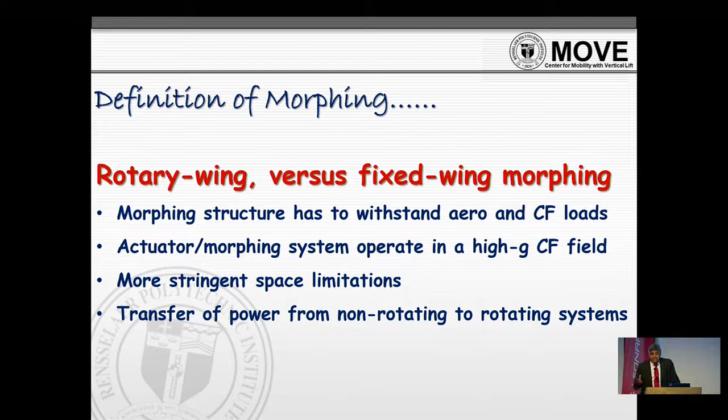The other big challenge is the transfer of power from the non-rotating to the rotating system. That could be electric power, hydraulic power, or pneumatic power, usually done through a slip ring. In a lab environment or in a wind tunnel, it works and you get the test done and show your results. But in an operational environment which is harsh with sand, ice, and moisture, the longevity of such systems becomes a challenge.

I want to talk a little bit about morphing classification and general categorization. In the fixed wing world, they use terms like gross morphing and fine morphing. What is gross morphing? Large things. If you change the sweep of a wing, that's gross morphing. If you're trying to change the span, big things, right, it's gross morphing. Smaller things like camber of an airfoil or slight nose droop, the fixed wing community thinks of as fine morphing.

But in the helicopter world, the distinction is typically based on frequency. If you're doing high frequency, low amplitude changes, that is basically active rotor control, done for a long time for vibration reduction, noise reduction, a couple of degrees of twist or a few degrees of flap deflection. Rotor morphing generally refers to higher amplitude, generally quasi-static deformation. It could be low frequency, one per rev, but generally larger shape changes, not so much for vibration and noise, but for other reasons that we will talk about.

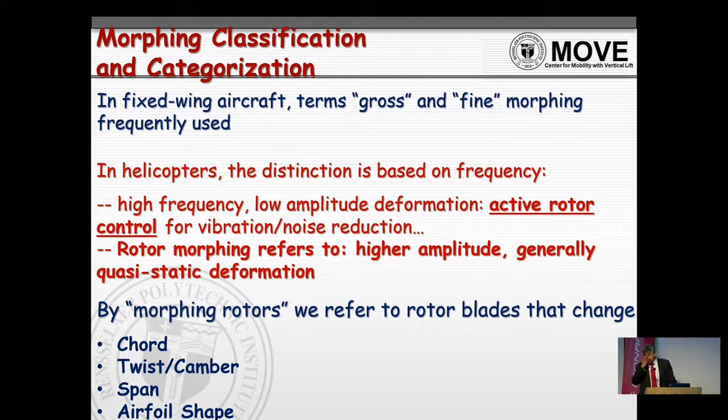So by morphing rotors, we typically refer to rotor blades that may change the chord, the twist, the camber, the span, or the airfoil shape. And if you're able to do all of that, what are the benefits it will give us?

First, it can give you optimal performance in diverse operating conditions, because typically the optimal geometry for hover versus high-speed flight can be different. If you have a fixed geometry rotor, it's either optimally designed for one condition and performs poorly elsewhere, or it's a compromise solution that doesn't do very badly anywhere, but doesn't do very well anywhere either. So the ability to change configuration would give you optimal performance at diverse conditions.

You're not dealing with a compromised design. Of course, you always have to think about a cost-benefit analysis, whether the benefit it gives you outweighs the cost. That's important. The other thing you can get with morphing is expansion of the operating envelope.

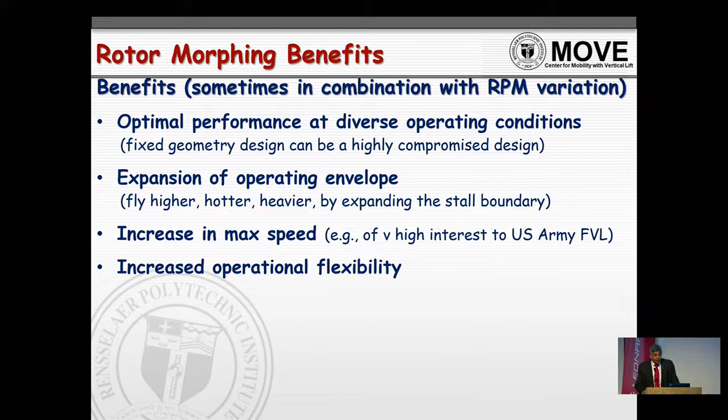So you may be able to fly higher, hotter, heavier, expand the stall boundary. You can increase the maximum speed. This is something that's of very high interest to the U.S. Army right now. They're working on the Future Vertical Lift program, and morphing also has the possibility to get increased operational flexibility.

So I'm going to dive into different types of morphing, okay? Let's start with chord extension morphing. Now, if you think of chord extension, I can extend the chord in two ways. One, I can have an elastic structural deformation, right? So I can have some substructure that deforms, maybe some skin that deforms or slides, or I can have effective chord increase through discrete shape change.

For example, if you look at these top figures here, what we have is a slit trailing edge and an extensible trailing edge plate.

So you look at it and you might say that an optimal airfoil performs very well. It gives you very high lift over drag, right? Now you have this optimal airfoil, and you've ruined its shape by sticking out a plate. The fact is that when you do it, it doesn't do that badly. It doesn't do that poorly, and it gives you the big thing you're looking for, which is the increase in the solidity of the rotor, or more blade area. This is something you can do rather easily as compared to elastically deforming a structure to significant extents.

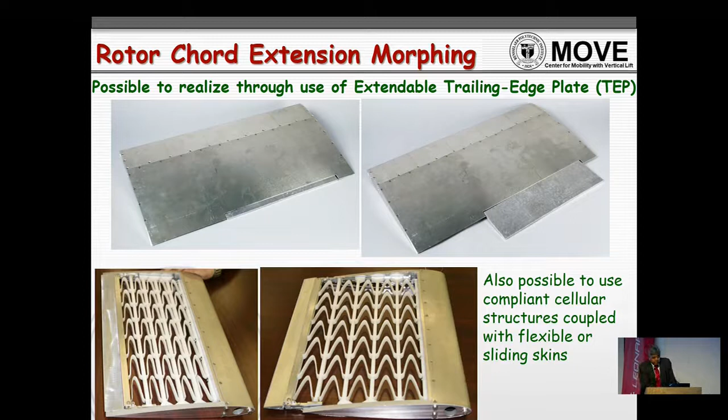So there are different ways you can achieve a particular goal. Now, when you think about chord extension, when do you typically want to use it? You typically want to use chord extension at the stall boundary, right? Because normally when you have a certain chord, and let's say you're near stall, you're flying hot, flying heavy, flying high, the first thing you're going to do is increase pitch and try to generate more lift, to compensate for, say, density reduction. And then you can do it no more because of flow separation or stall. That's when chord extension will really help you. So in a way of speaking, chord extension is a high lift device, right?

So if you're going to be using a high lift device, you should then compare it with other high lift devices, right? So one example of a high lift device is basically a gurney flap. A gurney flap is a small device that comes out perpendicular to the lower surface, and it can be right at the trailing edge, or maybe around 85-90% chord, and it can be either fixed or retractable, and it can be deployed.

So a gurney flap increases the max lift coefficient. However, if you look at CL versus CD, right? And if you look at a gurney flap, the black curve here that you see is for a baseline airfoil, and this red curve that you see is with a 2% chord gurney flap. So you get this increase in maximum lift coefficient, but see what happens to the drag, right? So at low CL, where you don't need the gurney flap, then you're paying a very high drag penalty.

On the other hand, if you look at this extendable trailing edge plate, this is the same airfoil in black, and in blue, what you have is the extensible trailing edge plate. So at high CL, what you've done is effectively increased the maximum lift coefficient by increasing the chord of the airfoil, but you don't pay this drag penalty at low CL. So that's the advantage of using an extensible trailing edge plate as opposed to a gurney flap.

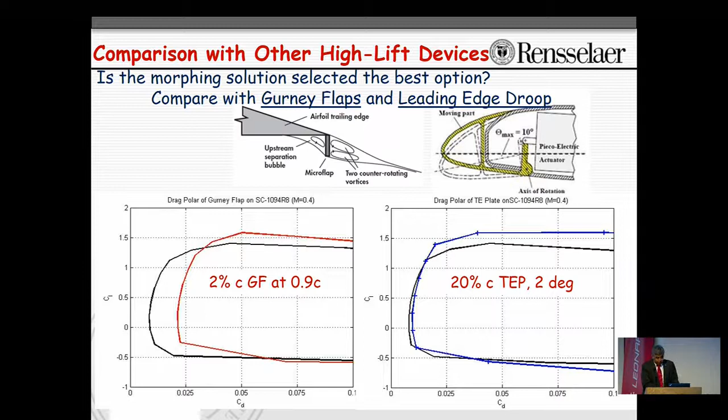So, in the next slide, I want to show the kind of performance benefits you'll get. Here are some simulations for a UH-60A Black Hawk helicopter at 130 knots, showing power on the y-axis versus gross weight on the x-axis.

What I have here are pairs of curves, the blue and green curve together form a pair, and there are three pairs. This pair is at 4,000 feet, this pair is at 8,000 feet, and this is at 12,000 feet.

Let's take this pair here at the lowest altitude. The curve in blue represents the baseline aircraft, and this pull-up you see represents stall, because it's telling you you're consuming more and more power but not able to generate any more lift. That's why the curve starts to pull up.

If you have an extensible trailing edge plate, on the Black Hawk from 63 to 83% span, so 20% span, with a plate that extends about 20% chord coming down at a 2-degree angle compared to the chord line, you'll move from this blue curve to this green curve. And that happens at any altitude.

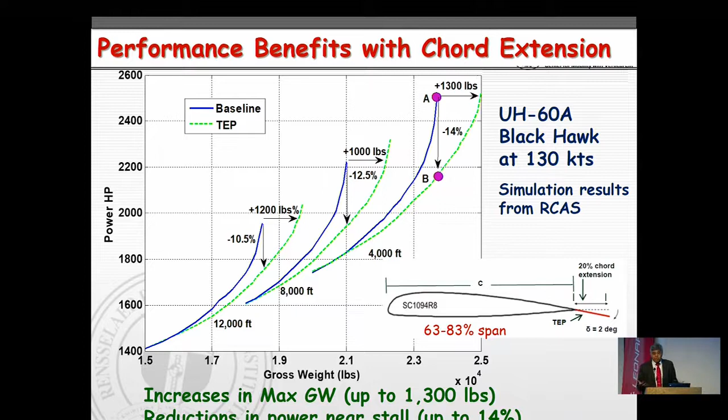So you can look at this pair of curves in two ways. Supposing I drop from point A to B, that says if there's no increase in gross weight, I get something like a 14% reduction in power close to the stall boundary. If I move in the horizontal direction at the same power, I get about a 1,300-pound increase in maximum gross weight. For a 20,000-pound aircraft, that's a significant percentage. So those are the performance benefits you get with chord extension morphing and stall alleviation.

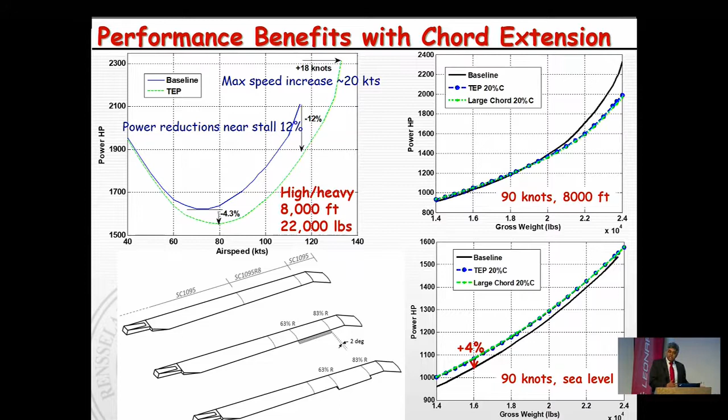So the point is this: I'm going to be operating most of the time in benign conditions, not all the time at the edge of the envelope. If I give myself a high chord to hit those points I may fly some small percentage of the time, I don't want to pay this 4% power penalty the 95% of the time when I'm not at the stall boundary. That's the benefit of morphing - you use it when you need it, and when you don't, you gain by not paying this power penalty.

Okay, so likewise, if you look at this particular chart, what I'm showing is some levels of vibration. Again, this is for the Black Hawk at 90 knots, at 8,000 feet. We have on the x-axis gross weight, so it's increasing gross weight. And on the y-axis, you have the 4P vibratory hub loads.

The leftmost plot is vertical shear. This is in-plane shear, so a combination of Fx and Fy. This is in-plane moments, so a combination of pitching and rolling moments. The baseline aircraft without chord extension is shown in the blue curves, and when you have chord extension morphing, you fall to the green curve. So you can see 47%, 30%, 50% reduction in vibrations.

Why do you have reduction in vibrations? Because the baseline aircraft was in deep stall conditions, and stall is not great for the rotor. Once you start pulling away from stall, you have better aerodynamics, which improves the loads.

So if you look at the combination of what chord extension morphing can do for you near the stall boundary, you can get 1,300 to 1,400 pounds increase in gross weight, close to 20 knots increase in max speed, about 12 to 14% reduction in power, plus this kind of 30 to 50% reduction in vibratory loads.

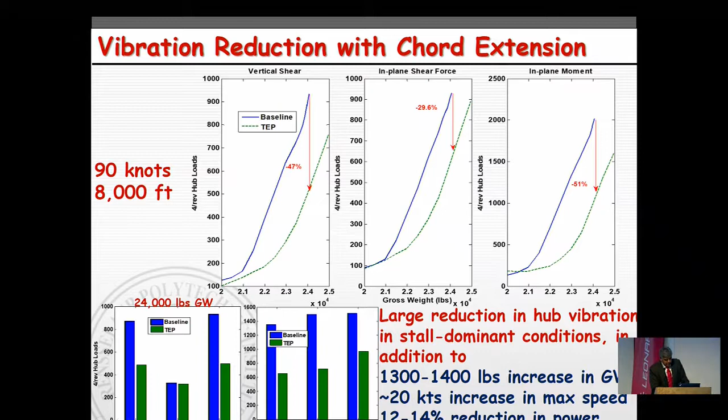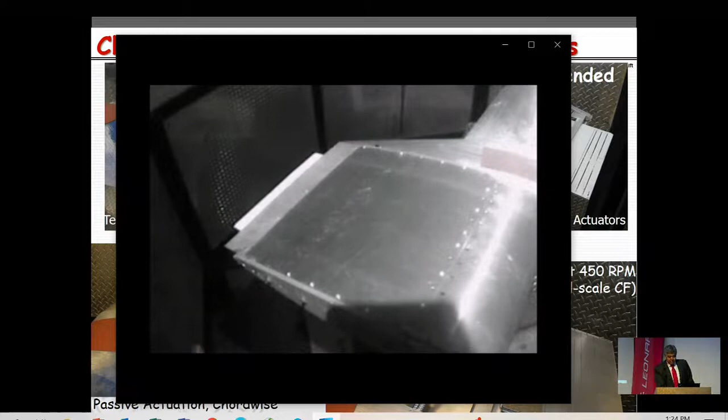This particular test is on a paddle. We have a boom and paddle, about a 7-foot radius. You can see this video looks stationary, but it's actually rotating. The strobe light has been synchronized with the rotational speed, but you can see that in the presence of the rotation, the electromechanical actuator, the EMA, is able to produce an increase in the chord.

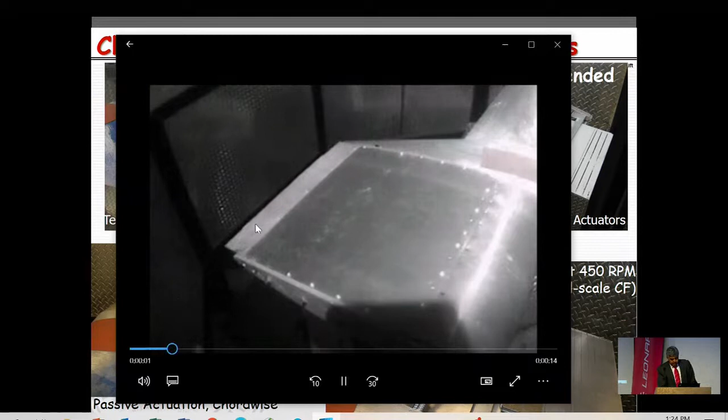Then the other thing we did is we said, what if we did not use an electromechanical or pneumatic actuator, a discrete actuator, and instead use the centrifugal force, or the change in centrifugal force?

In the second prototype, what you see is a device called a von Mises truss. The way a von Mises truss works is if you apply a load at the vertex, it eventually deforms, and it can snap. When it snaps, it goes from position A to position B.

So imagine if I connect, through a link, an extensible trailing edge plate to the vertex. When the von Mises truss is retracted into the airfoil, the plate is retracted into the airfoil, and when the von Mises truss deforms and goes this way, the plate gets pushed out, and I get a net increase in chord. Here, what you see happening is that the centrifugal force is predominantly acting along the span-wise direction, but not entirely.

There's also a chord-wise component, depending on the CG distribution and such. So the chord-wise component of the centrifugal force, as this RPM increases, keeps increasing, and there comes a point beyond which it will pull the system out.

Now, the thing is, how do you pull it back in? Because in that case, to push it back in, the force has to reverse, and the centrifugal force, when you slow down the rotor, becomes smaller, but it doesn't reverse. So to bring the plate back in, what we have is a retraction spring.

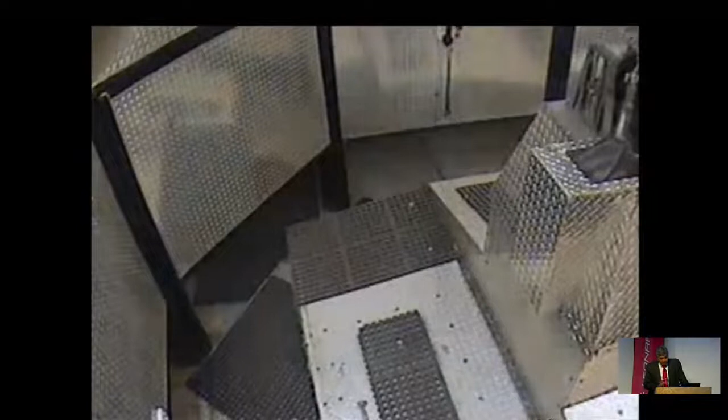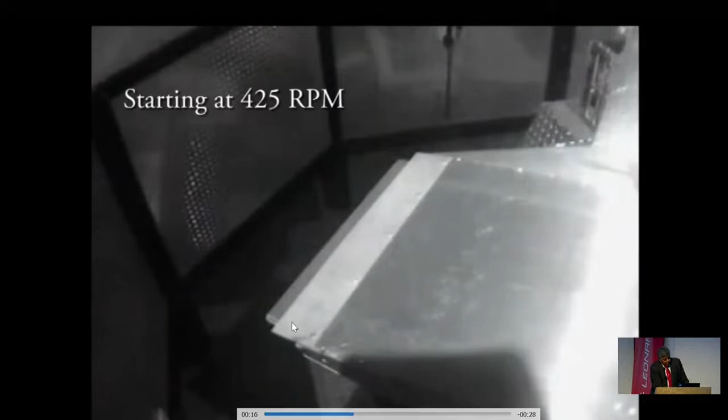If you look at this entire system, this is a test at 450 RPM, and you can start to see the strobe light is synchronized with the rotor, so it will look stationary, and you'll see the chord deploying. As the RPM is increased, this deploys, and then when the RPM decreases, it starts to retract.

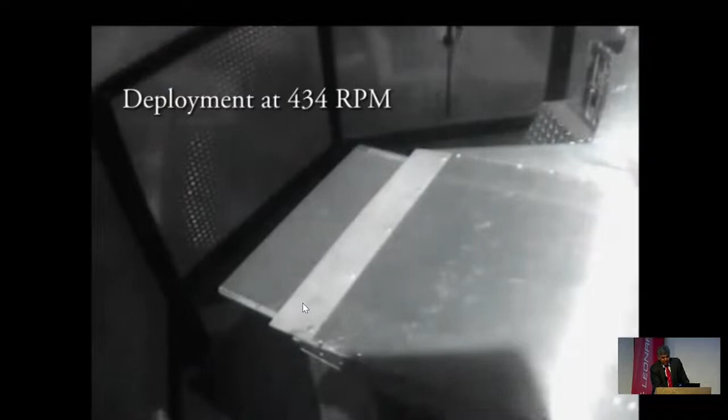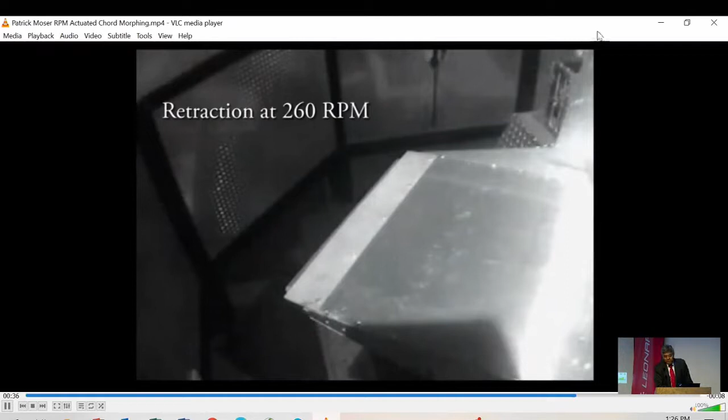So this is done without any actuators on the blade. This is done simply by changing the RPM.

All right, so I'm going to move to the next type of morphing, which is rotor twist and camber morphing. So all modern helicopters basically have a negative twist, or washout. Typically that is there on the blades to reduce induced power in hover and at low speeds. So in high-speed flight, this washout creates a lot of problem because you can get a lot of negative lift on the advancing blade tip, and it can create vibration and performance losses and so on, and produces larger loads.

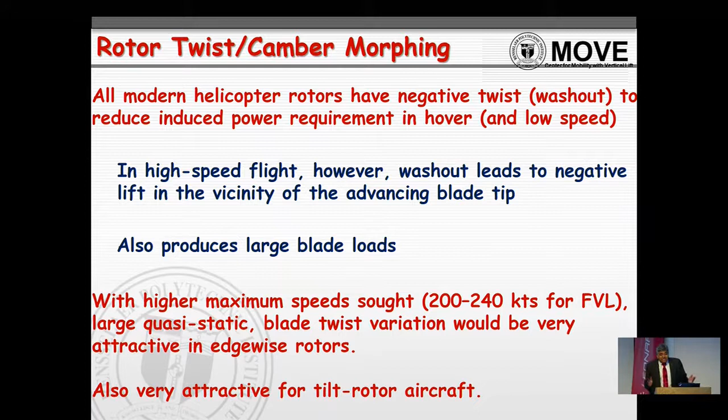So with the higher maximum speeds that are currently being sought for the future vertical lift program, they're looking for speeds in the regime of 200 to 240 knots. The large quasi-static blade twist variation would actually be very attractive to have on these edgewise rotors. It would also be attractive for tilt rotor aircraft, where you need maybe about 10 to 12 degrees for hover, but when you get the rotors in propeller mode, what you would like is 45 degrees or 60 degrees. So how do you bridge that gap?

So we did some work on variable twist. If you look at this rotor at the top, this is a 4-foot section prototype. It's not tested in a rotating environment, it's tested on the bench top. You can see a significant amount of twist.

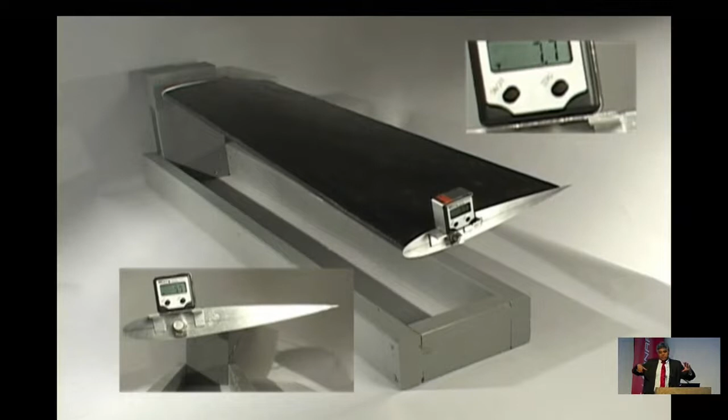So how was this done? If you think of twisting, you can twist a closed cross section or you can twist an open cross section. And if you twist an open cross section, the twisting will be accompanied by warping. So in this particular prototype, this trailing edge was slit, and we were introducing warping of the top skin relative to the bottom skin, and the reverse effect was being used.

So we were getting the twisting of the blade. There was a cylindrical spar and a number of ribs around the spar that rotated. As you might imagine, you get a lot of twist, 16 degrees, but it's not a very flight-worthy system, because you lost your primary load-bearing member, which was the spar.

So in the bottom example, what we did was we are not twisting this system. We've again used the same effect where we try to use warping, and what we have induced is camber. So in this case we've taken a CH-46 blade, a section of it, and we have left the spar, which is a primary load-bearing member, untouched. So that carries the bending loads, flap-wise, chord-wise bending, and a large amount of the torsion load.

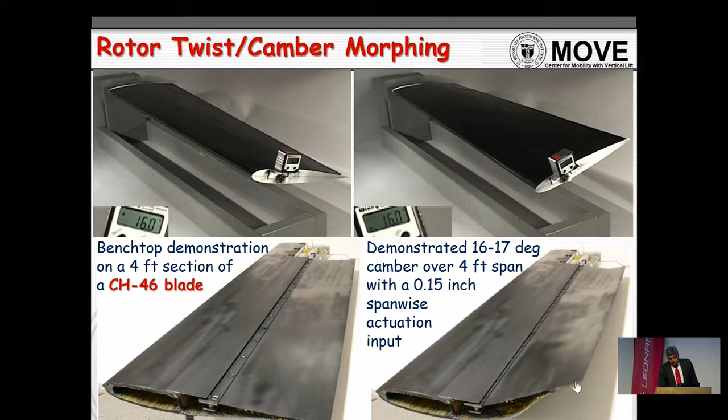This blade, what you're seeing here is a lower surface, and the skin has been slit just aft of the trailing edge, just aft of the spar. And again, there's an actuator here that's warping it, and there's a linkage. So as there is span-wise motion of that skin, there's also chord-wise motion, and the combination of those motions actually results in the camber of the airfoil.

Now, camber of the blade is aerodynamically similar to twist. Let's think about why that would be the case.

So if you think about lift on a blade, here is a blade, and I'm going to introduce camber over the inner half, or a span-wise variation in camber over the entire blade. What I'm going to show here on these two lower plots is lift distribution versus span. The solid line is the baseline blade, and the dashed line is when I have this kind of inboard camber. The left figure shows camber over half the blade, and the right figure shows camber over the full span.

So what is it doing? When you have camber and you go from the solid line to the dashed line, what you've effectively done is reduced lift outboard and moved lift inboard. When you negatively twist the blade, you're doing exactly the same thing—redistributing lift. So instead of getting a very high peak near the tip of the blade, you're starting to move lift inboard, which is what makes the rotor more efficient.

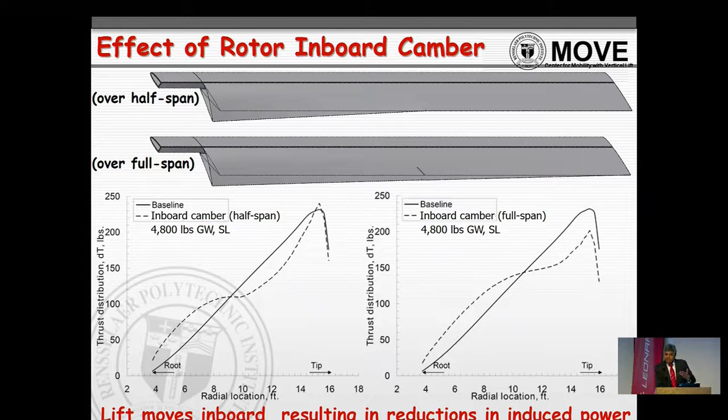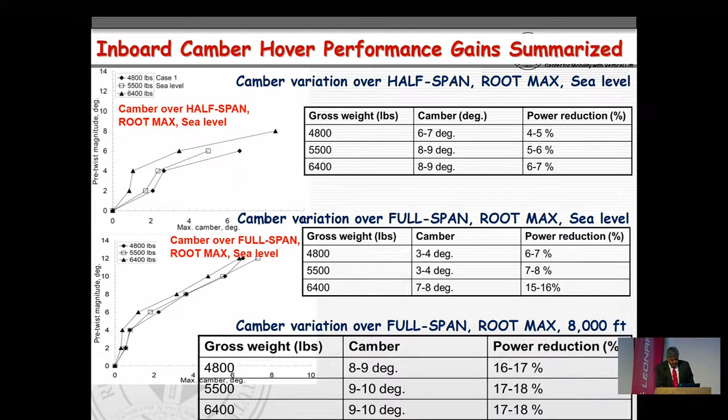So you can effectively do the same thing by camber, but at a lower price in terms of safety and load-bearing capability of the rotor. I have some results here which show the equivalence of camber and twist, but let me, in the interest of time, just move forward to the next concept of morphing.

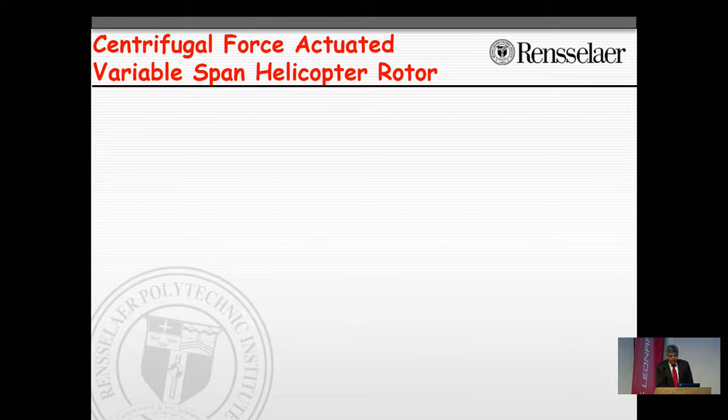Which is centrifugal force actuated variable span rotor. This was some work that we did a long time ago, but here's the basic idea: supposing I had a rotor blade which was telescoping, with an inner fixed part and an outer sliding part, and there was a spring restraint between the two.

At low RPM, low speeds or no speed, the rotor would be compact, but as the rotor starts to spin faster and faster, the centrifugal force on this outer sliding part becomes greater and it overcomes the spring stiffness and starts to extend. So that's the fundamental idea here.

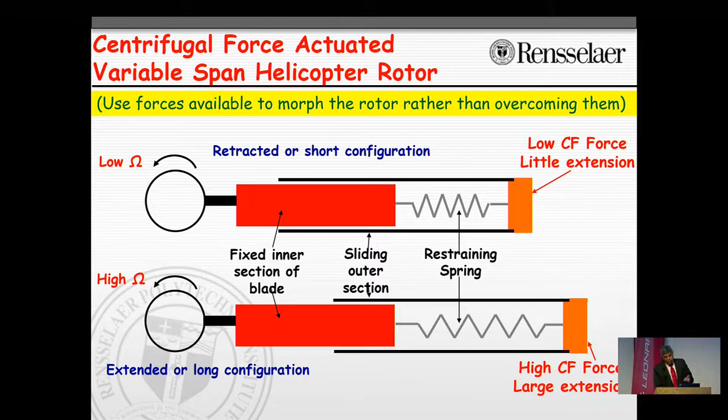The beauty of something like this is that there's no actuation used. You're simply using the change in RPM. So here is a prototype that we built and we demonstrated it. I'll show you a video.

This prototype has the telescoping blade and there's a piece of tape. The white part is on the fixed inner portion, and the blue part of tape is at the root end of the outer sliding portion. By the way, the rotor is spinning a lot faster than it appears here.

You'll see that as the RPM starts to increase further, the white and the blue tapes move further apart, which shows you that the rotor span is increasing. For this particular prototype, that increase in span was about 20%.

So you can ask the question: do I want my entire blade, or half the mass of the blade, or some significant portion moving in that kind of dynamic system? If you were concerned with risk reduction, one thing you could do is think of an extensible tip, where a much smaller part of the blade is effectively moving, and you're still getting an effective increase in span.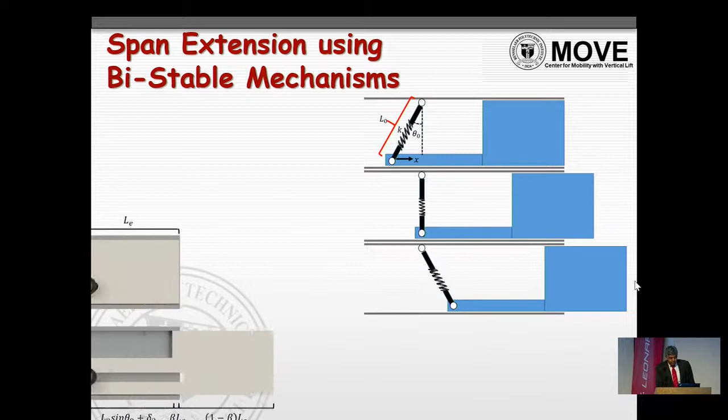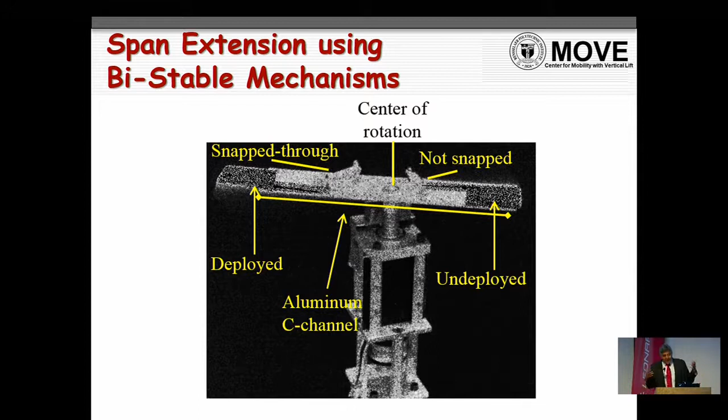We actually built a little model of that, and we tried to test it on a small, maybe 1.5 foot type model. The thing we found is that one side deployed before the other side, because there are differences in friction there. So what we did is we came up with a cable system that connected the two so that one could not deploy without the other -- they had to deploy together. And when we did that, things worked well.

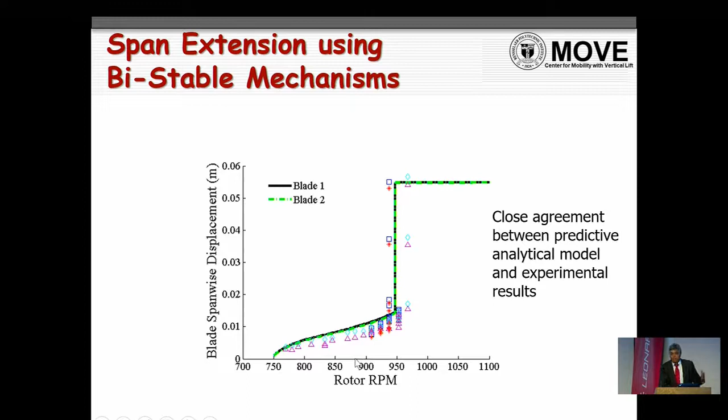This is RPM on the x-axis, and you can see the blade span-wise displacement. It increases, increases, increases, and then it snaps, right? And when it snaps, you get a significant increase in span. Then, of course, there's a maximum allowed displacement where we have a lock, so it's not going to increase any further beyond that. You can see that the symbols, which is our test data, compare very well with our model predictions.

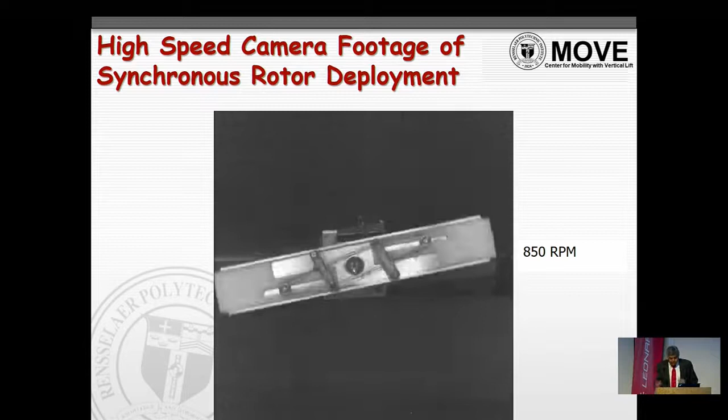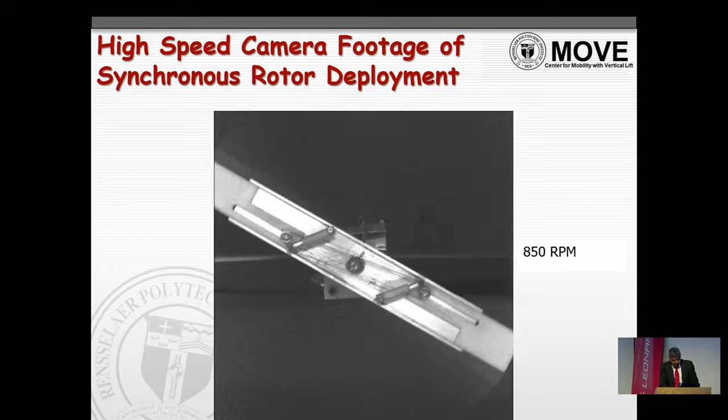I'm going to start this video. It's at 850 RPM, and it goes up. You can start to see this whole little system -- it's not a blade, it's just a model -- but you can see the von Mises trusses expand, and both sides of the blade expand together. We have similar videos in a different view, so I'll just pass through that.

Here are some performance results. I'm going to skip this slide, but I'll talk about this one.

One of the things you can do is think about the benefits of geometric change and operational speed together. So, can I change my RPM? Yes, and I can change it relatively easily. It's easier to change RPM. There are other challenges like vibrations and different resonances, but it's easier to change RPM than to change span or chord, right?

But let's see what I can do with just one of them, and what I can do with the two together. This plot on the bottom left shows a UH-60A at 80 knots cruise, at 18,300 pounds gross weight. On the x-axis I'm showing the radius of the blade, and on the y-axis I'm showing the RPM.

This point here is the operating condition of the actual rotor. These colors show power levels - red means high power and blue means low power. I would like to be generating this 18,300 pounds at the lowest possible power. At this particular condition, if I move down here, I can get about 100 horsepower reduction just by changing RPM. I don't need to change span.

Let's see what happens when I go to a very high gross weight - this is 24,000 pounds. This here would be the nominal aircraft, its radius, and its operating speed. I cannot reduce RPM - if I reduce RPM, I'm going to hit stall. So if I reduce only RPM, I'll get a max of maybe about 50 horsepower reduction. However, if I'm able to reduce RPM and simultaneously increase span, I can get about 150 horsepower.

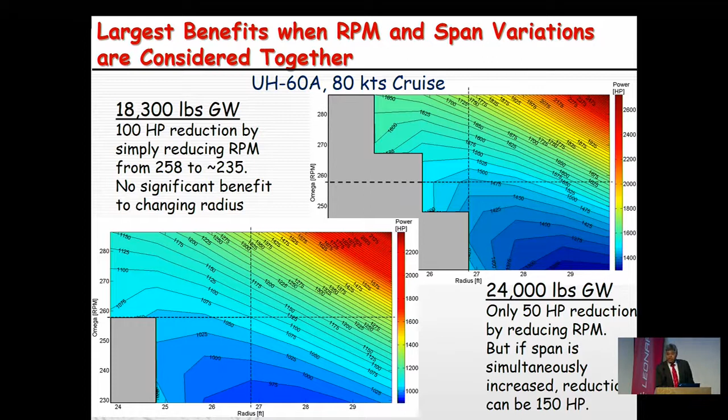So you have to think about what is your objective and what is the easiest way to reach that objective. When I can do it with RPM alone, I would always do that. But when the combination of RPM and some other geometry change gives me greater benefit, then that's when I would consider the morphing of the blade.

This span extension looks like a very high-risk thing, right? But the companies, the OEMs have waded in those waters as well. This is Boeing - they worked on a project known as the disc rotor project, where they would have these extended blades in low-speed hover conditions, and then in high-speed conditions, they would retract these blades into the hub, and then you would have wing-borne lift. In the disc rotor project, this was not centrifugally actuated - it was all actuators. Sikorsky similarly worked on the variable diameter tilt rotor, where again they had actuators to have these larger rotors in the lifting condition, and then the rotors become smaller when they're propellers.

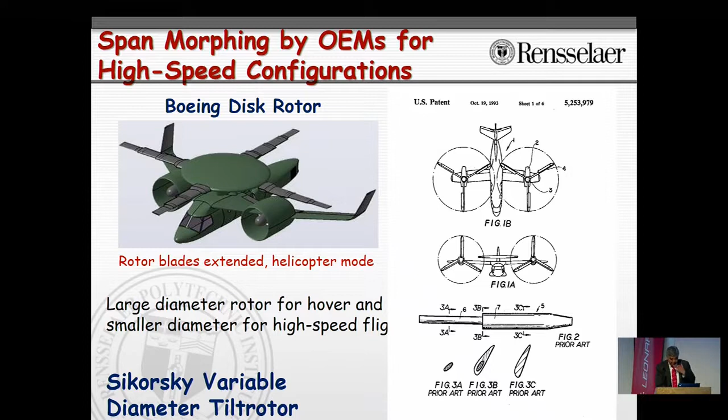Now one of the other morphing type changes that we looked at was this reversible airfoil. Let me give you a little history here. Boeing had something called the X-50 Dragonfly program - this is a canard rotor wing. They had a two-bladed rotor, and if you think of the leading edge, the idea was that it would be a rotor in low-speed conditions, and in high-speed conditions, it would just stop and be a fixed wing.

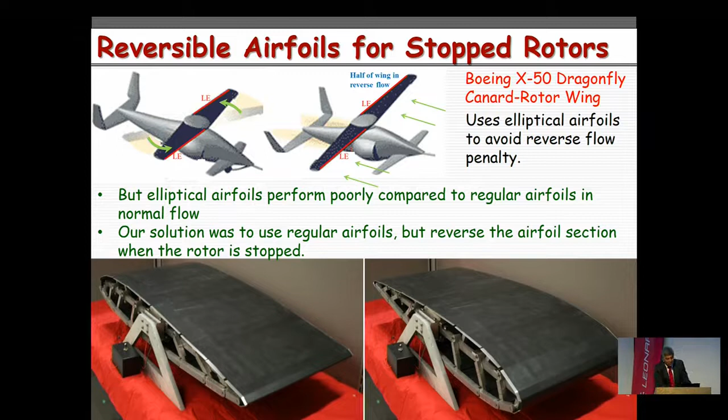So the problem is this - if you use a normal airfoil, let's say this red part is the leading edge, you have the leading edge over here and over here. As a rotor it's working well for you, but when you stop it, you have one of these sides of the wing essentially in reverse flow. Boeing's solution to that problem was to use an elliptical airfoil. The problem with the elliptical airfoil is it does neither very well in hover nor does it do well in cruise.

So one of the things that we did was we asked, can we reverse the airfoil? We came up with a mechanism that actually does that, and the idea would be that you would have half the wing where you can actually flip the leading edge to the trailing edge.

So here are some related slides. The prototype that we created used straight links, and when you use straight links, if you look at the pressure distribution, you're going to get these spikes because your airfoil surface is piecewise continuous - well, in terms of slope, you have piecewise continuity. But if you use curved links, then you can get rid of that problem and you'll go to this green curve for the pressure - so you can improve the design.

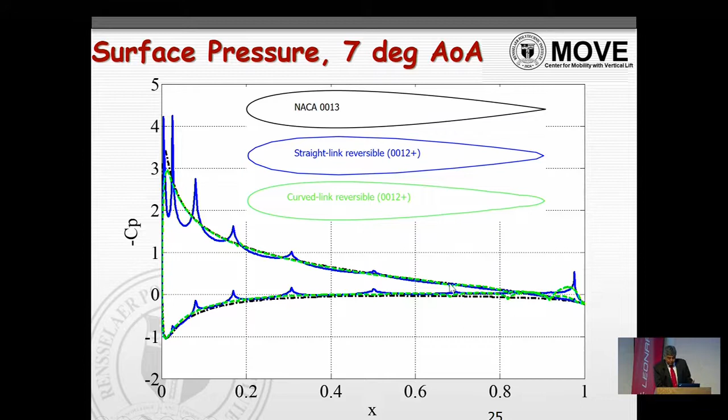What I showed was for a symmetric airfoil, but you can also design the linkage system such that the top half and the bottom half is different. So you can get this kind of airfoil reversal even for a cambered airfoil.

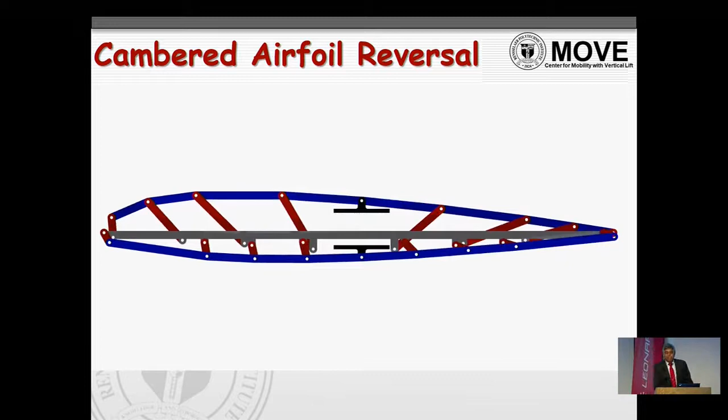Okay, so one other concept we worked on was wing folding. Why would you want to fold the wing? If you think of a high-speed compound helicopter, where you have the rotor doing the primary work in hover and low speeds, but at high speed you have these wings. At low speed, you get a lot of downwash from the rotor onto the wing, and you get these down loads.

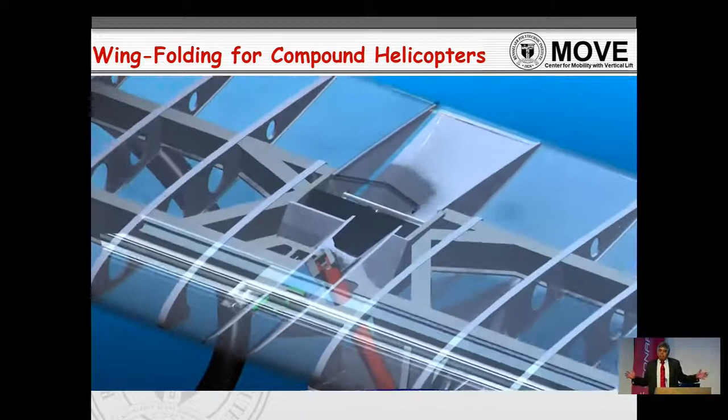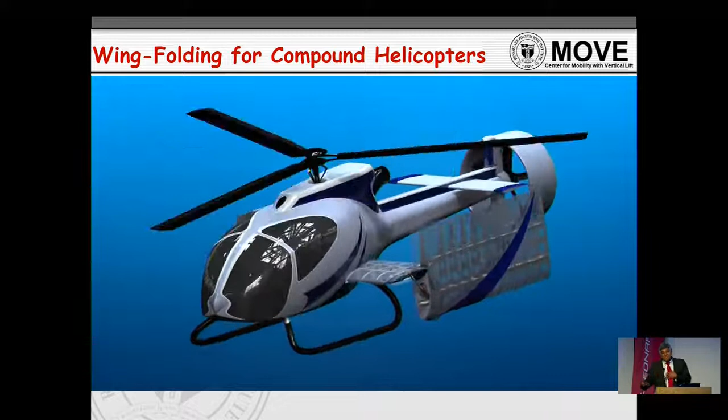So we asked the question, can we get the wing out of the way? My solution was actually to have a retractable wing, but the students who were charged to work on this problem came up with a different solution. Their solution was actually a folding wing. And I thought to myself, how innovative, right? So when you're working with good engineers, you don't tell them what the solution is. You tell them what the problem is and let them come up with a solution.

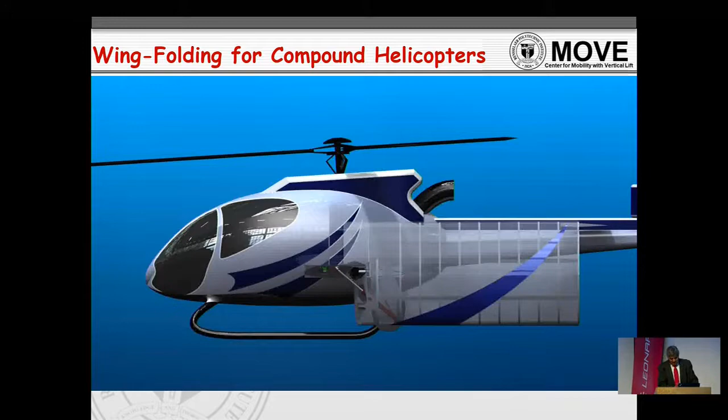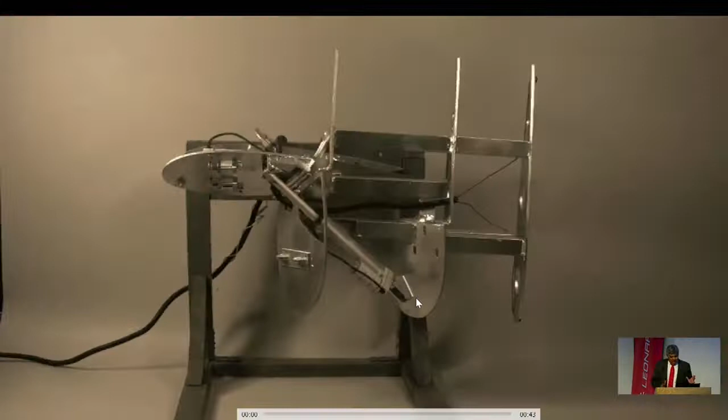So their idea was, how about we tilt the wing parallel to the fuselage when you're in low speed, and then in high speed it starts to come out. So this is the concept, and then we built a prototype that kind of does that. This is the frame of the wing without the skin, but you can see that we have an actuator, one that deforms the wing, and then there's another one that locks it in place. This is the wing in its deployed condition. You started from the retracted condition.

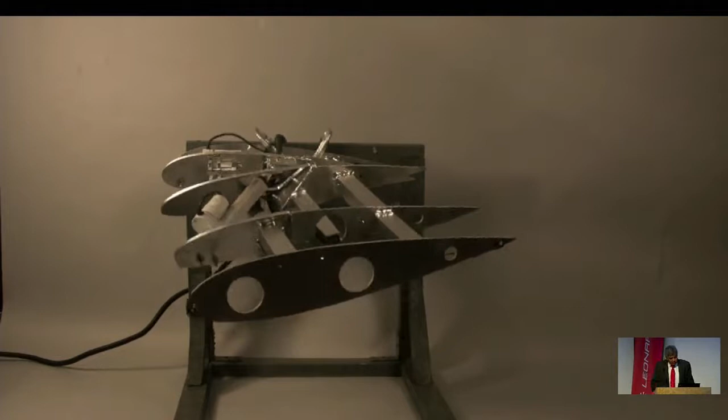Okay, so let's move on to this idea of autonomous rotor morphing. I started with morphing many, many years ago, and more of late I've been putting more energy and effort into this idea of autonomous shape change. Can we use the change in operating conditions to affect the desired shape change? That alleviates the need for complex actuation, it alleviates the need for power transfer, etc. And we already saw some examples of that. We saw rotor span change and chord change realized with RPM.

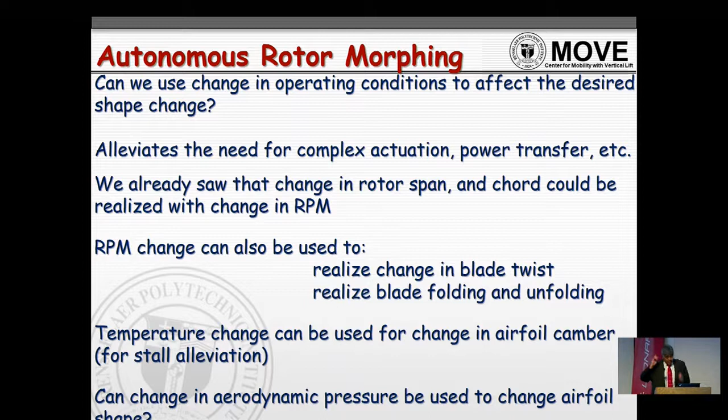There are also other things you can do. You can use RPM change to realize change in blade twist. You can use RPM change for blade folding and unfolding. And then of late I've been very interested in temperature change. Can temperature change be used for cambering an airfoil? And can we use aerodynamic pressure change to morph an airfoil? Okay, so I'm just going to expose you to some ideas here.

So here is a change in RPM, which changes the centrifugal force. Here's the idea. If you have a blade that has extension twist coupling, as the centrifugal force changes, its twist will change. The problem or the challenge that you're dealing with here is the following.

Supposing I start with a UH-60-like blade. I have to build it in this way, along this pink line. So I'm building it nose up, okay? And then when I'm at 100% RPM, the extension twist coupling, the large CF force at 100% RPM starts to twist it down, down, down, down, down, and I go to this black line over here. The green line is the actual UH-60 twist, and the black line is like an idealized equivalent twist, okay?

And then when I reduce the RPM to say 80%, which is where I might want to be in a high-speed compound version of the UH-60 - if I'm operating at 200, 220, 225, 230 knots, maybe I'll reduce the RPM to 80%. I would like it to be untwisted, but I can deal with maybe 4, 5 degrees twist. I don't want 12, 14, 15 degrees twist. So I'm going to come to this red line then. You see at 80% RPM, I'm going to be at the red line. At 100% RPM, I'm going to be at this black line. This is the change in twist that I want, right?

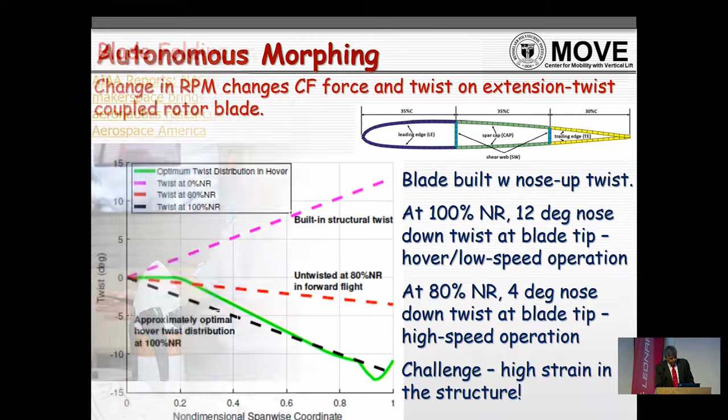So in terms of autonomous shape change, this is another thing that I found very interesting. This was work done by NASA, and they're using RPM change to actually - I'm going to play this video. This is a NASA video.

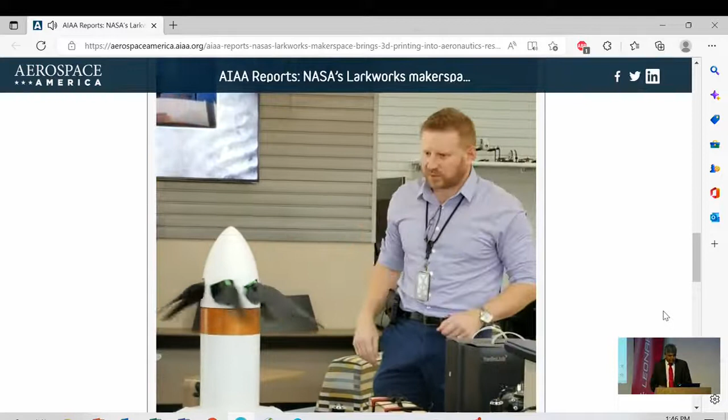There's some springs on the bottom as these spin down and slow. They self-stow against this. Okay, so I'll play it one more time. There's some springs on the bottom as these spin down and slow.

They self-stow against this. It's just a spring-restrained blade that, when centrifugal force acts, unfurls and acts as a propeller. But when you're not spinning that motor, the whole thing becomes compact. And this was on this aircraft over here.

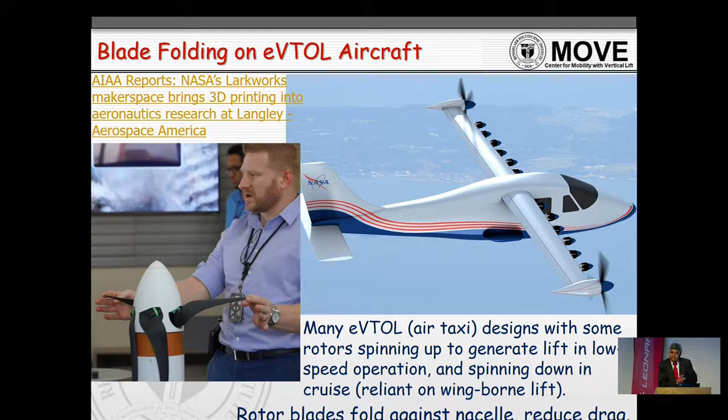At low speeds, all these props were operational because they were trying to use a rotor-blown wing effect. But at high speed, you only had these tip props providing propulsive thrust, and you didn't need the wing lift enhanced, so all these rotors were turned off, and the props folded. That's another example of autonomous shape change.

So here we are looking at autonomous shape change using shape memory alloys. Shape memory alloy is a temperature sensitive material, and the idea is that supposing I put one on the blade - I'll skip this in the interest of time.

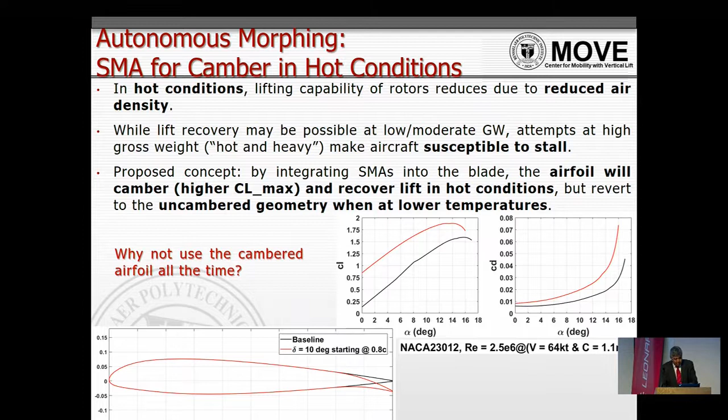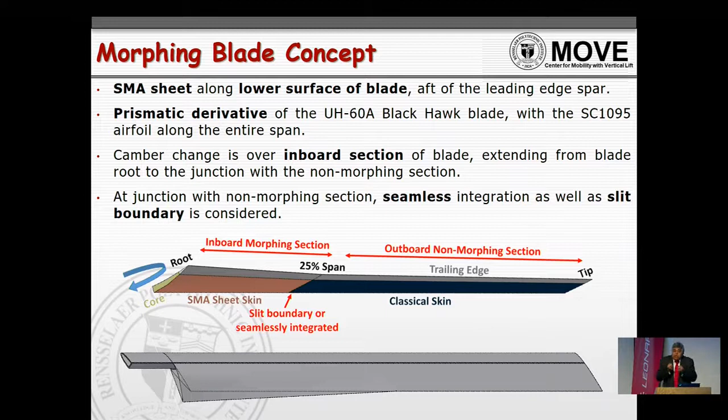So what really happened was the SMA went through a phase transformation. It wanted to contract when the temperature was elevated, and when it contracted, the blade started to camber. That was the mechanism here.

Then we had a follow-up study where, in the previous design, there was a lot of strain on the upper surface of the skin. We wanted to reduce that, and we also wanted to make the core more chordwise compliant. So we changed the design a little bit - we had this SMA skin and started to put in some intermediate spars to support the SMA lower skin.

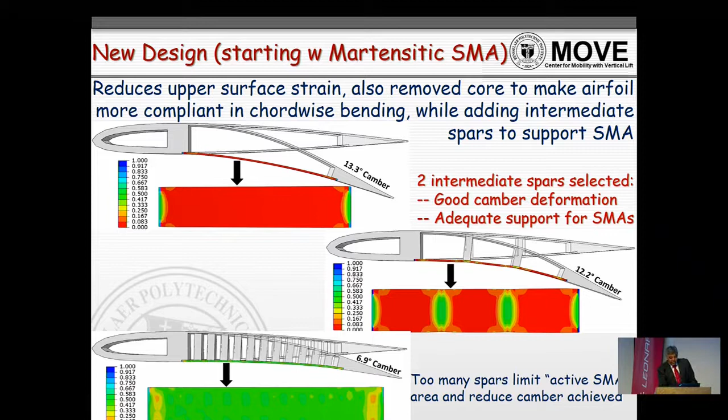When you put more spars, you get better support, but then you get a little less camber because there's less active SMA material. When you put a lot of spars, the active SMA material starts to become less and less, and you go down to about 6 or 7 degrees of camber.

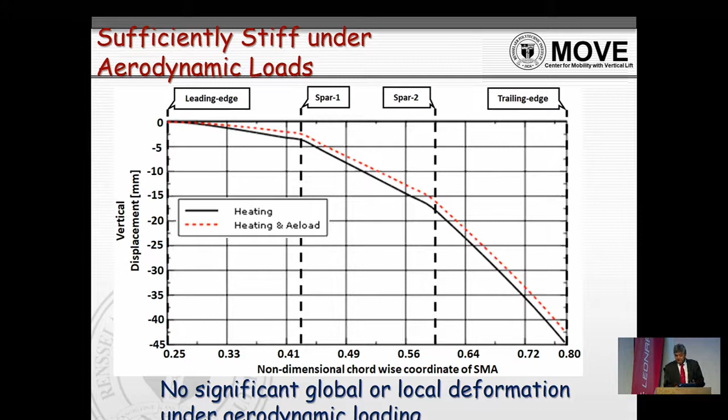Here we're showing what happens when you heat this system. The black curve is the change in camber you get, going from the spar end to the tip of the blade. The black curve is what you get with heating alone, and the red curve is what you get with heating plus the aerodynamic load. You can see the system is stiff enough to withstand the aerodynamic loads, which are not completely negating the change in camber you're getting.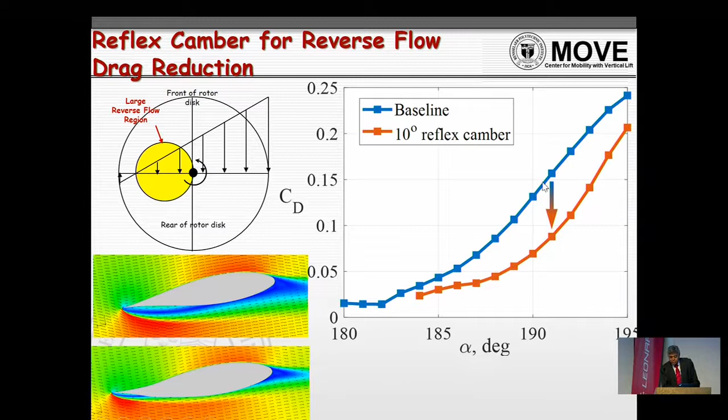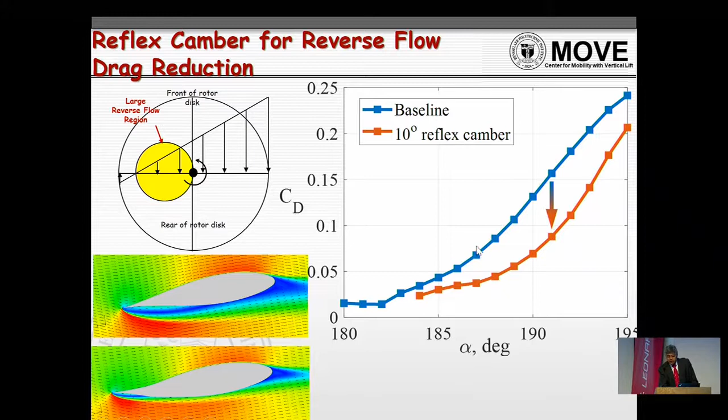This blue curve is the drag coefficient for an airfoil in reverse flow without any reflex camber, and this red curve is with the reflex camber applied. So there's a significant reduction in drag. That's one way you can do it.

The other way is to change the airfoil shape. We started with a supercritical airfoil, shown here in black, which is used on high-speed aircraft. This supercritical airfoil does well in normal conditions but not so well in reverse conditions. Taking this supercritical airfoil at 6 degrees angle of attack in reverse flow, there's some separation, and at 9 degrees, that separation becomes much greater.

Now, elliptical airfoils do well in reverse flow - they don't do well in normal flow, but in reverse flow, the separation you were seeing is not there. That's why the drag of an elliptical airfoil in reverse flow is better than for a conventional airfoil. So what we did is ask: what if we change just the lower surface, not the entire airfoil?

This is all load-bearing structure, so the less change you make, the better. Most of the effect can be achieved just by changing the lower surface, going from the black shape to the red - this is what we call a lower surface modified ellipse. If we do just that, at 6 degrees and 9 degrees angle of attack in reverse flow, you don't get the kind of separation you were getting for the baseline airfoil, and you get an aerodynamic flow much closer to the elliptical airfoil.

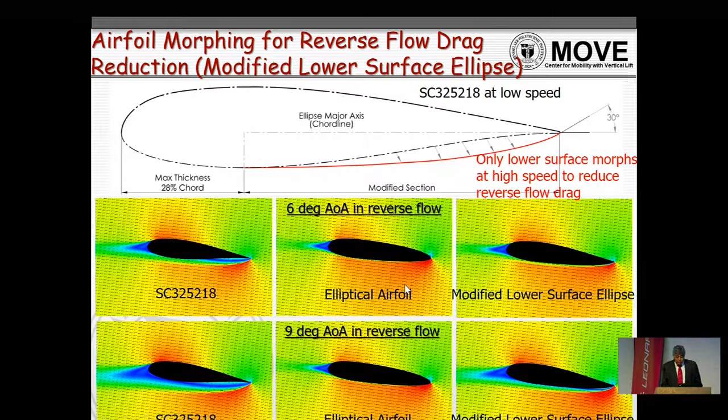This was work we did with Raytheon, where we defined what the curves should be - starting here and going over here - and they actually built the prototype, doing a really remarkable job. You don't see the shape change very well in this view, but you see it beautifully over here. This is the skin, the lower surface skin.

This is normal operation, but then you have these linkage mechanisms. What you're seeing here in silver is the rib. We had 2 ribs at the end, with a region in between the ribs.

And these linkages, when they're deployed, you can see that this lower skin goes from here to here. So essentially, you went from this black to the red.

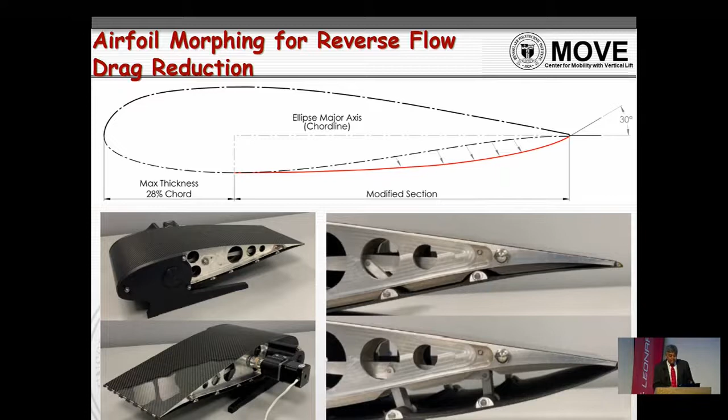I'm going to pose a question now. In normal flow, the lower surface experiences pressure and the upper surface experiences suction. But when you are in reverse flow, this lower surface over here experiences suction instead. So the question is, do I need all these actuation mechanisms, or can I use the change in pressure, the suction you get in reverse flow, to actually deploy the airfoil? I'm putting out some ideas because these are directions I feel are probably worth exploring.

So what happens if you needed a little more than the Black Hawk? What do you do then? You use the Chinook. That's what happened in Afghanistan. The Black Hawks could not fly over the mountains in hot conditions at such altitude. So you go to the Chinooks, but the Chinook's bare airframe is much, much heavier than the bare airframe of the Black Hawk. So you're carrying all that empty weight of a 50,000-pound aircraft just to carry those extra 5,000 pounds, meaning more gross weight and more drag.

If you look at the Black Hawk at 23,000 pounds, this would be the power required. This would be the Chinook airframe trying to do that same 23,000-pound job, and you can see you'd be spending so much more power because you're heavier and more draggy.

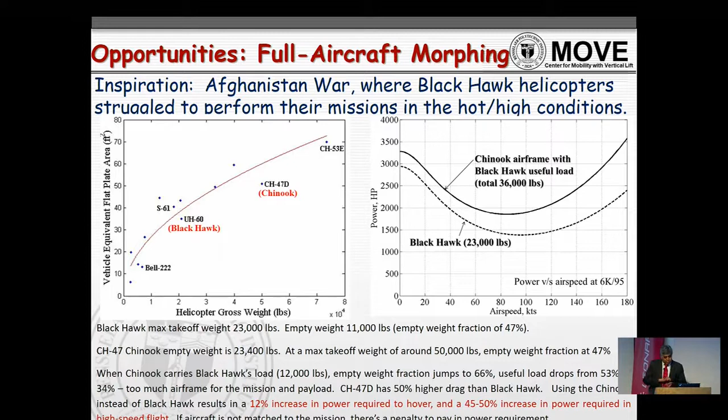So the question is, can we have a horses-for-courses type of approach? What if we had the ability to add lifting fans to a Black Hawk or to a Chinook? Obviously this isn't in-flight morphing, but operating condition to operating condition, in certain cases I would have this. It's like saying my blade chord for any helicopter is so much, but if I'm operating on Mount Everest, can I use a different blade, a wide chord blade? So similarly, can I add features to an aircraft when I need to?

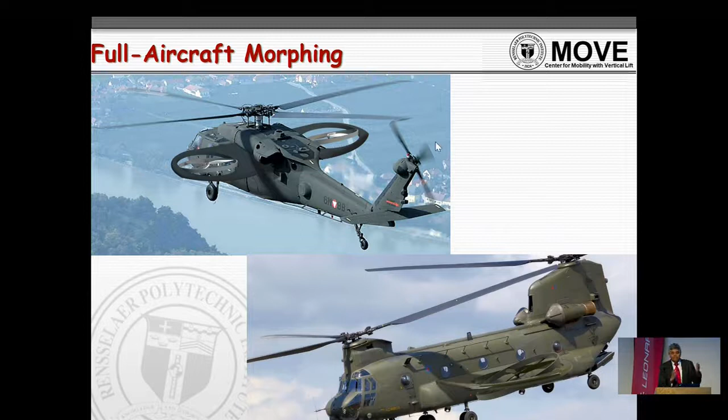So here, suppose I have a quadcopter in red doing a certain mission, going a certain range, carrying a certain payload. But I need to go further, so I need more battery, or I need to carry more payload. What if I could add more units? This was an idea we proposed a long time back, and Boeing worked on it too. They came up with something called the Lift Project, where they said we'll keep adding units and build an aircraft to meet the mission.

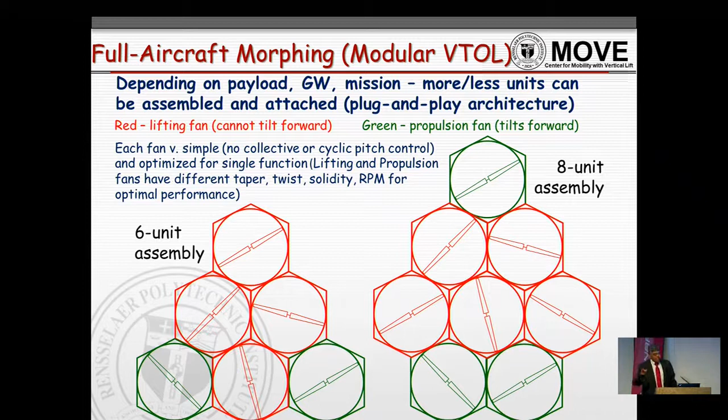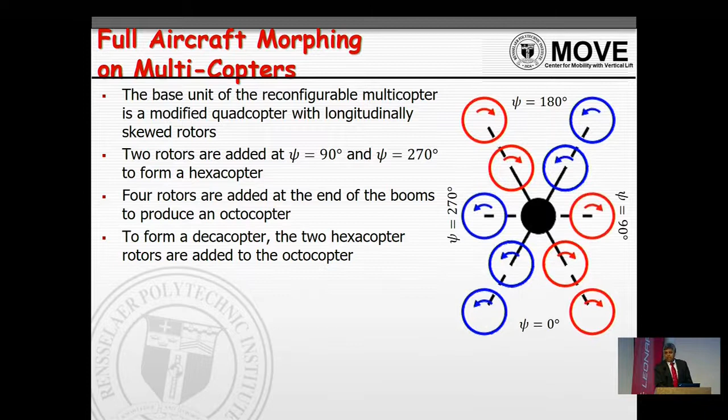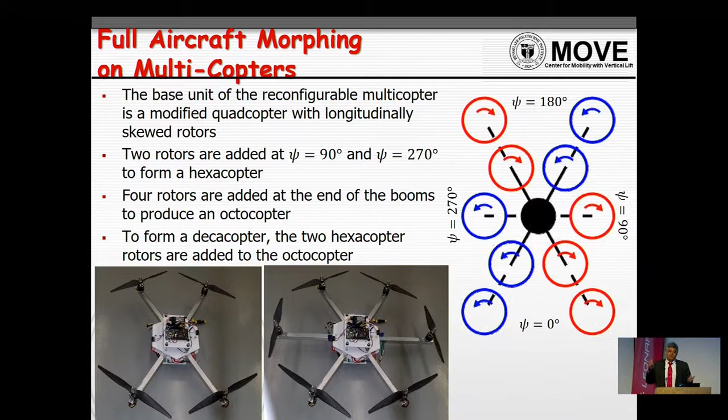We did something similar here. What if you start with a quadcopter, and you need more range or more payload? You make it into a hex by adding 2 rotors. You need to do even more, get rid of those 2, make it into an oct. You want to do even more, make it into a decacopter. So we actually built this: a quadcopter, and we added 2 booms to turn it into a hex if you needed to do more. When the booms were added and the contacts were established, the flight controller could tell we need to use hexacopter controls, not quadcopter controls.

I think I'm out of time, so I'll wind up with these 2 slides. Challenges and opportunities: system integration, weight, complexity, reliability, this is an issue now. And stiffness versus compliance, how do you make it stiff enough to carry load yet compliant enough that you're not spending too much actuation force and power?

Reconfigurable controls with morphing is another area, because a lot of these high-speed aircraft, like compounds, have fixed-wing controls and conventional rotor controls. So how do you exploit that? Morphing for additional uses like low noise, and it's important to work with people who understand rotorcraft performance, because there are a lot of people who say, I can change the shape of a structure without understanding what is really needed of this aircraft. Failure modes is another issue that not too many people in the morphing world have looked at in depth.

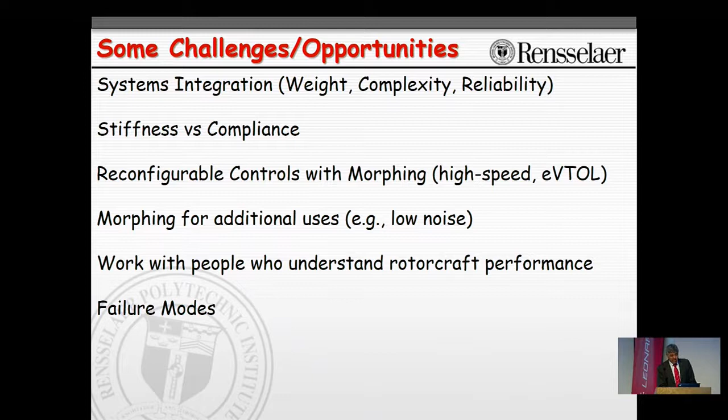So more than fixed-wing aircraft, the challenges of morphing are greater, but the benefits of morphing for rotary-wing aircraft would be very significant. Flexible skins may be nice, but not critical. Discrete shape change rather than continuous may be adequate. Centrifugal force is the 800-pound gorilla in the room. Exploit RPM change when possible.

Do not get too attached, this is my own view, to a specific way to implement a certain type of morphing. If you need to camber, don't say it has to be an electromechanical actuator. Maybe an SMA is better, maybe electromechanical, maybe something else. Do not get too attached to a specific morphing solution for a system-level objective. For example, don't say I need to droop the leading edge. Try to figure out what it is you want to do. I want to push stall out. If I want to improve the stall behavior, then compare everything that improves stall behavior, whether it's leading edge droop, gurney flaps, chord extension, or whatever you have.

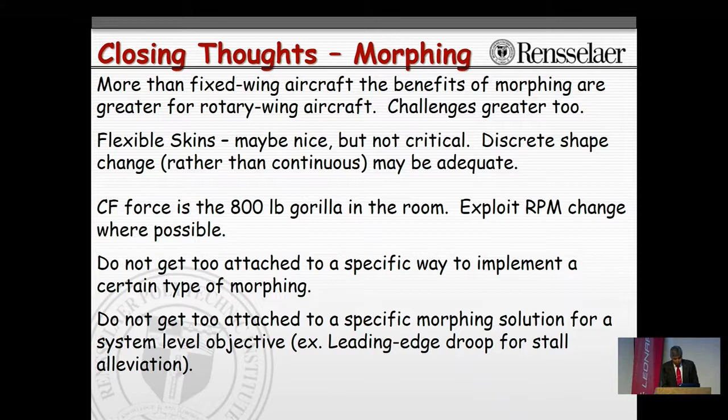So, acknowledgements: I want to thank the alumni who worked with me. This is all their work, and I get the joy of presenting it to this group. There are a lot of PhD students who are now at Boeing, Sikorsky, working with the Army, Bell, Joby, various companies. I have a very strong team right now with 10 PhD students and 2 research scientists. And I wouldn't have done all of this without my sponsors and many useful conversations with so many colleagues and collaborators. Thank you for your attention.

I'm sorry for running long, but I'm happy to stay here and take a few questions if you have any.